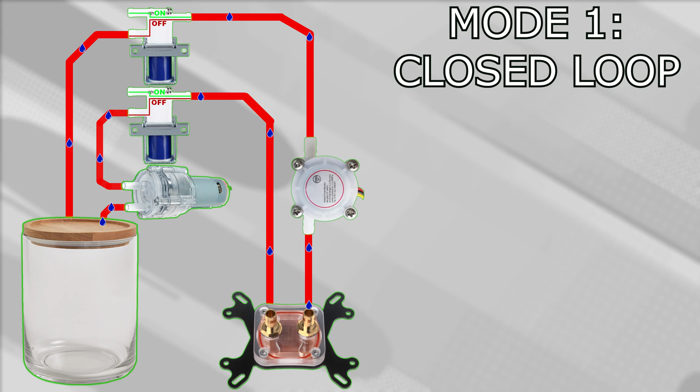First of all, the circuit. This cooling system can work in three different modes. This is the classic closed loop, quite easy: the water drains the heat from the water block and exchanges it with the radiator. As you can see, there is no radiator in this circuit. I didn't want to put any radiator, and instead I put a huge tank, and I wanted to see if a tank like that can stabilize the temperature of the water.

The second mode is an open loop. The water comes from outside to cool down the CPU, and there is a continuous flow of cold water. This mode is supposed to work with a water well. In this way, I can send the water back to the well and avoid wasting any water. The major benefit from this mode is, since the well is underground, the water is cold no matter the ambient temperature.

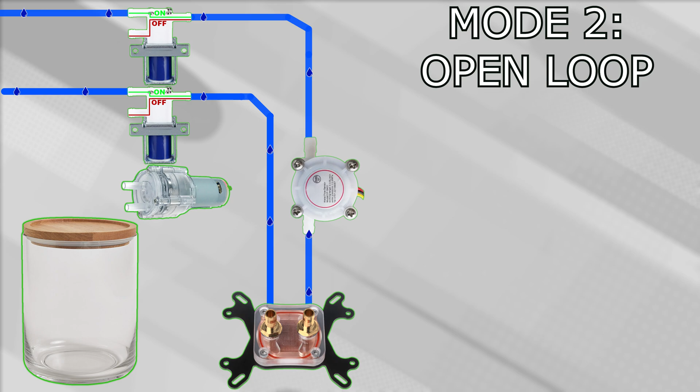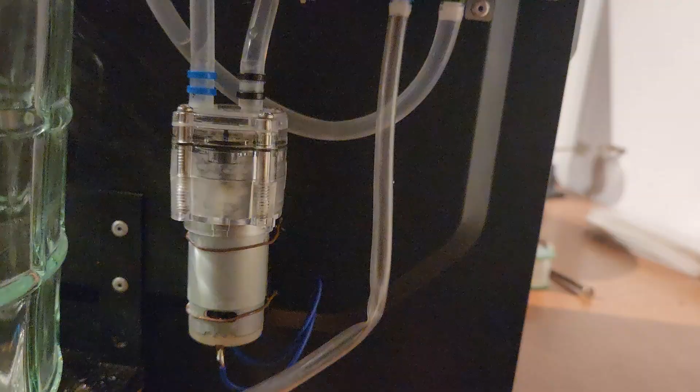I also did a third mode, the hybrid mode. Basically, at the beginning, I just wanted to build an open loop and experiment with it. But then I thought this thing will be really useless once I'm far from an outlet. So I implemented the closed loop as well. After that, I had everything I needed to do the hybrid loop.

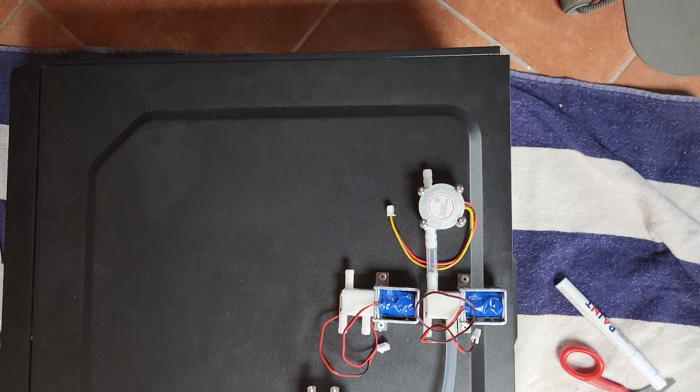But what is it? This mode has three different phases, and I use the valves to deviate the flow of the water. It's basically a closed loop, but when the temperature reaches a critical threshold, the system switches to phase 2. In the second phase, one of the two valves turns on.

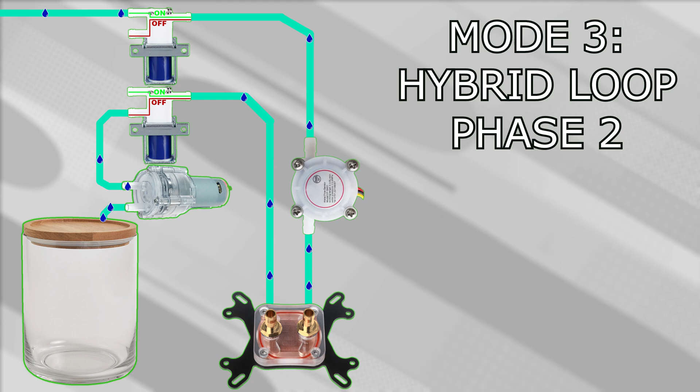This causes the water to flow from the tank to the sink. In this phase, the water level in the tank goes lower and lower. When it reaches the minimum level, the system switches to phase 3.

In the third phase, both valves have the opposite position compared to before. In this configuration, the system takes the cold water from the outside to fill the tank. Once the tank is full, the system goes back to phase 1 and stays in that mode until the water temperature is under control.

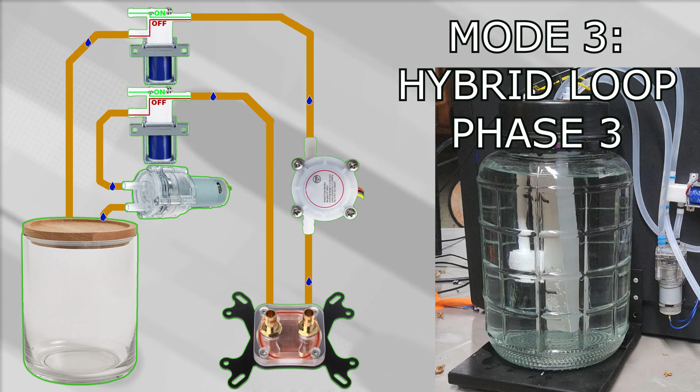Before showing you some benchmarks, I will show you in detail the components that I used and how I put together all the pieces.

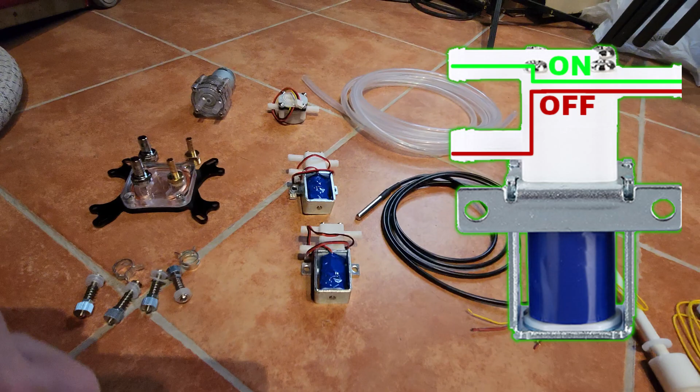The valves are three-way valves. That means I can deviate the flow of the water from point A to B or C. All the components that I bought have connections for 6mm tube.

The flow meter will be super useful to make some good benchmarks and to record how much water has passed in the circuit, and also the speed of the water flow.

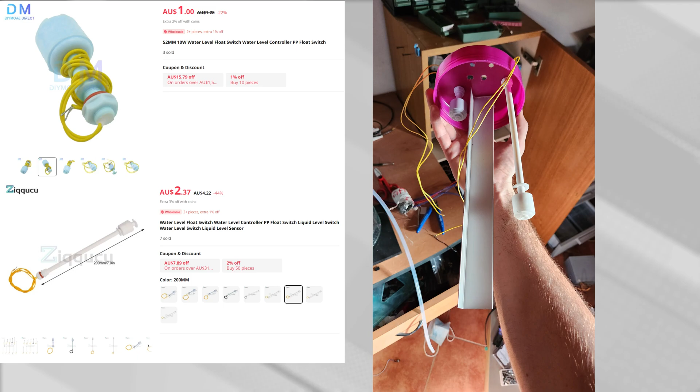Inside the tank I will fit 2 water level sensors and 2 temperature sensors. All the components will be driven by a prototype board that I will fit in the HDD slot.

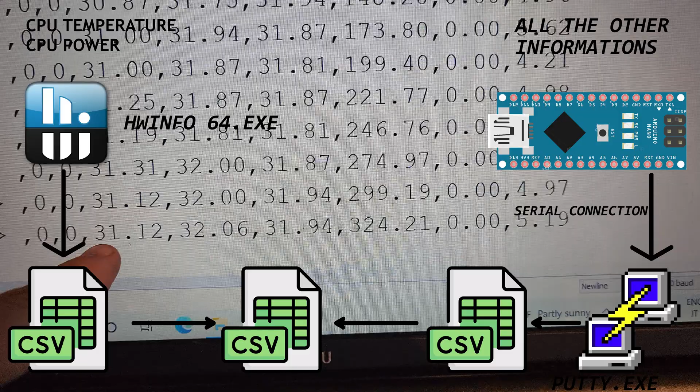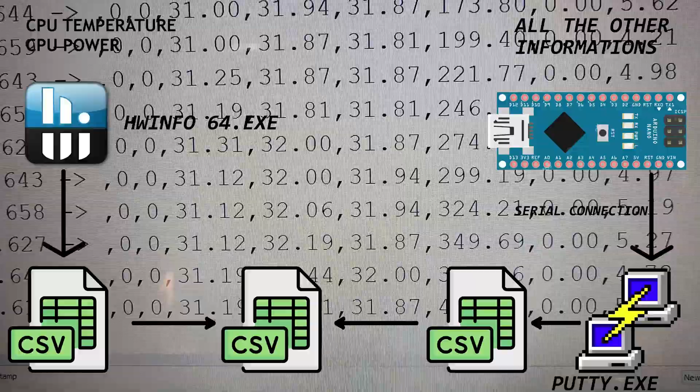This board will take the supply from the PC and through a USB port will send the information to the PC to do the benchmark. I will log some additional information through the software HWiNFO 64. In this way I can log some information from the SoC, like the CPU power and the CPU temperature.

The first test that I did was with the stock Intel cooler. I started the rendering to have a CPU usage of 100% and just let the test run. In a few minutes the temperature reached the maximum of 93 degrees. The temperature fell from 93 degrees only when we stopped the rendering.

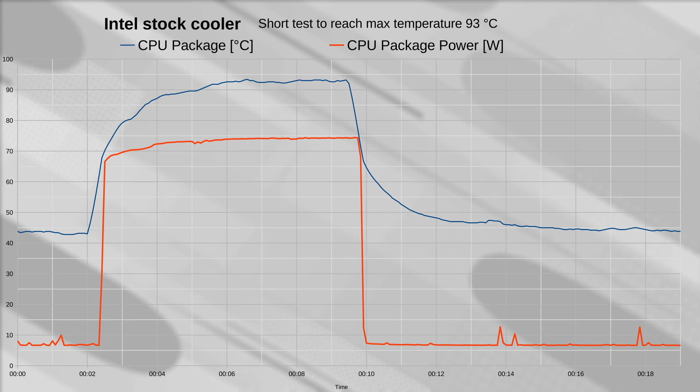The CPU had the thermal paste changed just 1 year ago. Then I changed the case because the old one was falling apart. After 2 days I could finally try this Frankenstein cooling system.

The first mode that I will try is the simple closed loop. So we start the rendering, and as I could imagine, the temperature started to rise slowly and steadily, since there is no radiator and the glass of the tank is also a bad heat conductor. We also have to observe that the ambient temperature is really high. This will change dramatically the result of some of the tests that we will see.

After 2 hours of testing, the temperature of the water coming back from the CPU was reaching a whopping 49.31 degrees, so I decided to stop the test. This is not the best result in the world, but I could expect something like that.

I would say that the closed loop will make the job for me. I would be able to use this PC without any water outlet close by. Also, we have to consider that in daily use, the CPU is far from 100% usage all the time.

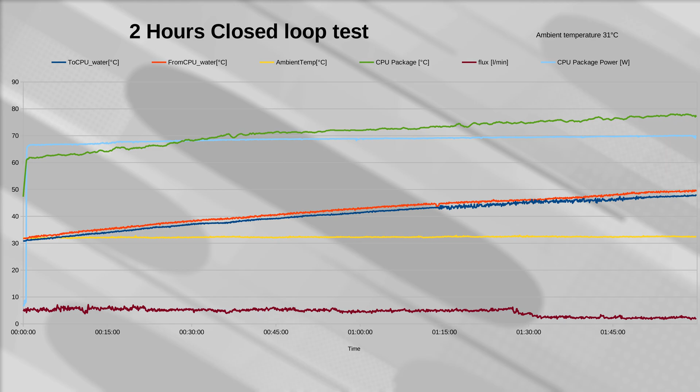In this graph, we can also see something quite sad. Thanks to the flow meter, we measure how many liters per minute flow in the circuit. I bought every component of this circuit on AliExpress, and the goal was not to achieve top performance, but to build a funny and cheap cooling system.

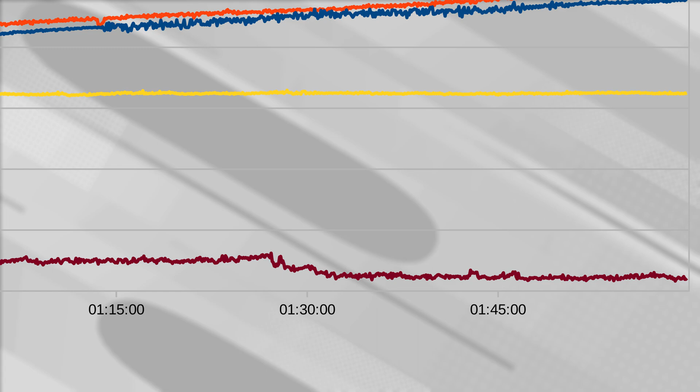The pump unfortunately didn't like that much hot water and reduced, without any apparent reason, the flow of the water from 5 liters per minute to between 2 and 2.5 liters. In the next test, the pump will never give a constant flow of water again.

The second test is the open loop, also known as the boring test. In this test, I connected the water circuit to the tap that comes from my water well, and the temperature of the water was 100% steady since the temperature can't rise in this condition. In the second half of the test, I moved the valve of the tap to increase the water flow.

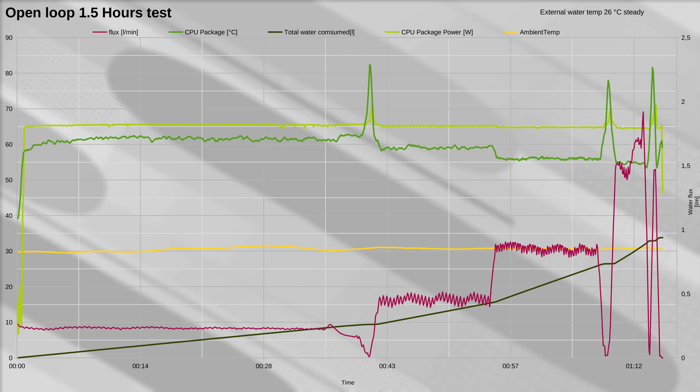Here we can see something interesting. The flow of the water is not so important to cool down a CPU compared to the water temperature. Making the flow 2, 4 or 8 times higher will make us drop just a few degrees on the CPU.

Finally, we can try the hybrid mode. I did more than one test in this mode. Let's see what I've got.

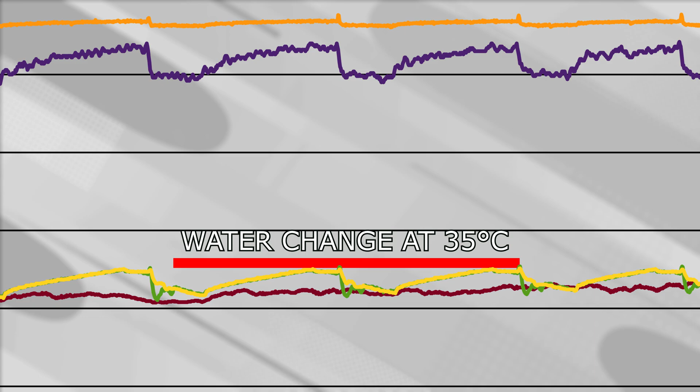In the first test, the max temperature that I allowed for the water before taking cold water from the outside was 35 degrees. This would be okay on a winter day, but in this hot summer the ambient temperature was 31 degrees. Every 25 minutes the water comes from outside.

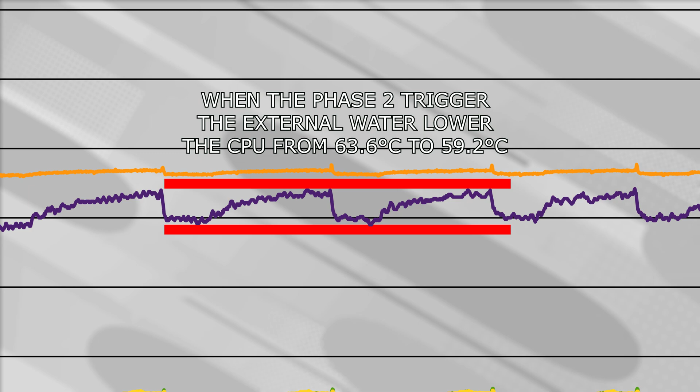The gap between the high level sensor and the low level sensor lets exactly 2.05 liters inside the system, while the total capacity of the tank is 4 liters. And this lowered the temperature of the CPU from a maximum of 63.6 to a minimum of 59.2.

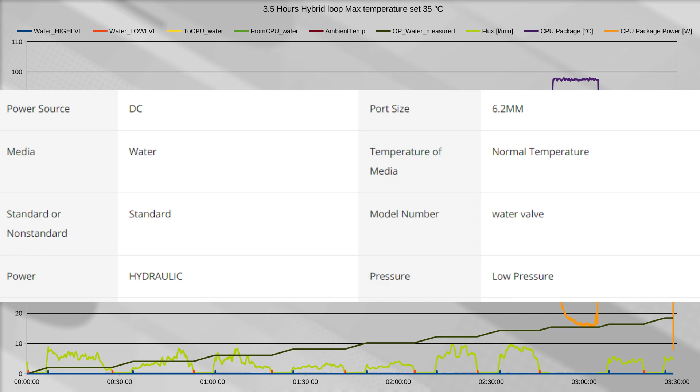These abnormal things that you can see at the end are unfortunately a stuck valve. This let the system go dry and stay like that until I fixed it. I think these valves are not suitable to work with hot water, as the description says normal temperature.

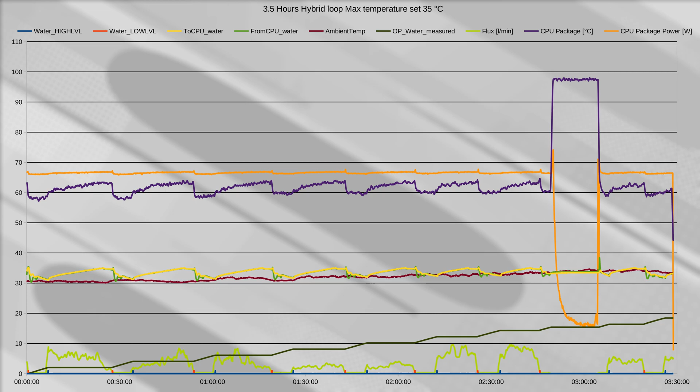In 3.5 hours, we used 18.43 liters of water from outside. If we had to pay for that from the tap water, it would be 0.41 cents in Italy.

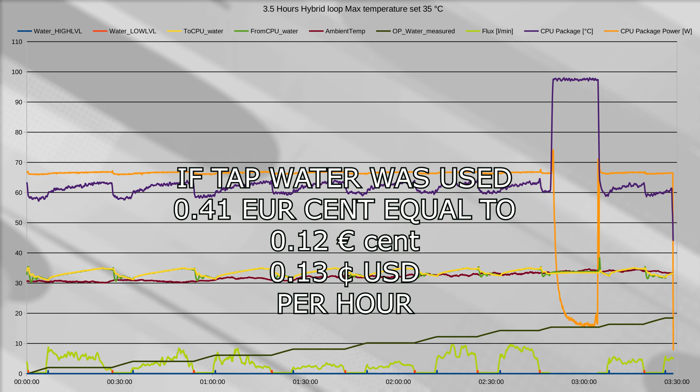For the second test, I raised the threshold to 45 degrees, but in 4 hours I never reached that temperature. Now we could say that the temperature I set is too high, but what about the first test when I reached 45 degrees in 2 hours?

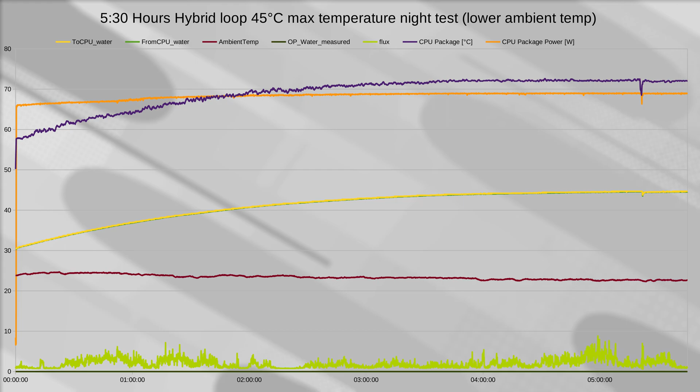The point is that we can see how much the ambient temperature completely changed the result of the test, and how every time we take a benchmark we should log the ambient temperature as well. In the next test, the water will reach temperature in 1 hour thanks to the much higher ambient temperature.